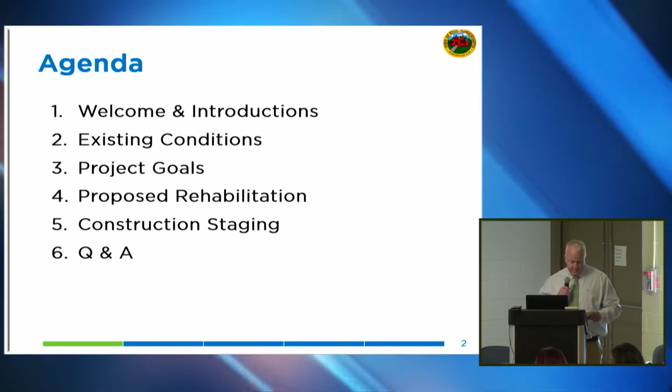So at this point, I'd just like to go through some introductions. From MassDOT's District 3 office, we have the Assistant Bridge Engineer, Mickey Splain. Our right-of-way representative from MassDOT is Melissa O'Day. Our consultant representation tonight from Fuss and O'Neill is Jamie French and Kristen Hayden. Our public outreach coordination consultant is Nate Curtis, who you met earlier, and Taylor Miller. Our stenographer tonight from Arlington Typing and Press is Greg Tarbucks. He'll be making a verbatim transcript of the hearing tonight.

The public hearing notice was placed in the Metro West Daily News on August 1st and August 8th. It was placed in the Beacon Villager as well on August 1st and August 8th. And the notice was also in the Stow Independent and Bolton Independent, and those dates that it appeared were July 26th and July 31st. A copy of the public hearing notice will be attached to the final hearing transcript.

So part of the project team: MassDOT's in-house bridge design group is doing the bridge design, and Fuss & O'Neill will be doing all other highway design, utility coordination design, and environmental permitting. Howard Stein Hudson, as I mentioned earlier, are assisting us with the public involvement. But I also want to point out that the town of Stow has been a great team member in this project through the preliminary design, helping us identify important aspects of the bridge location and concerns of the citizens.

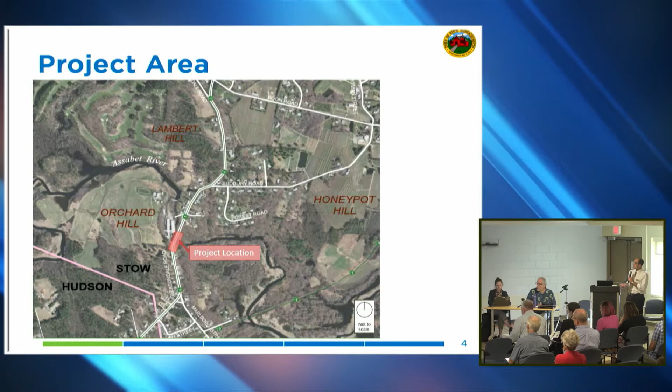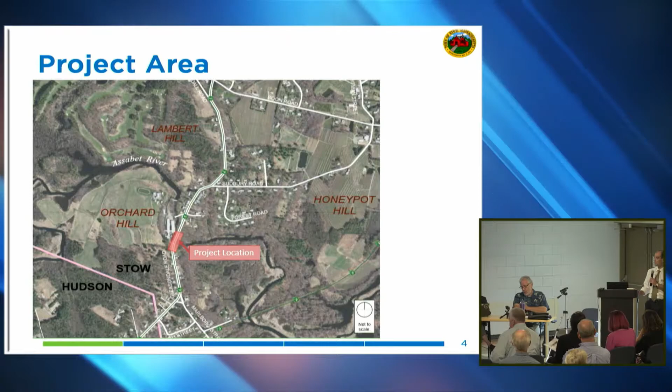Thank you very much, John. Appreciate it. So this is our project area, the area I'm circling with the laser pointer, that's the bridge in Gleasondale. We have the homes of some of our abutters who we've joined on a few site walks, and as the senator mentioned, we have some of the apple orchards around here, a very important road. This summer my toddler has developed a fixation with a book called Picking Apples and Pumpkins, so I have a feeling I may be joining you in the fall. I will try not to be an obstreperous driver when I get back.

So the existing conditions out there, this is a picture of the underside of the bridge, and you can see those deteriorated conditions. There are other photos that are worse, but I thought that's a pretty good one. It's pretty indicative.

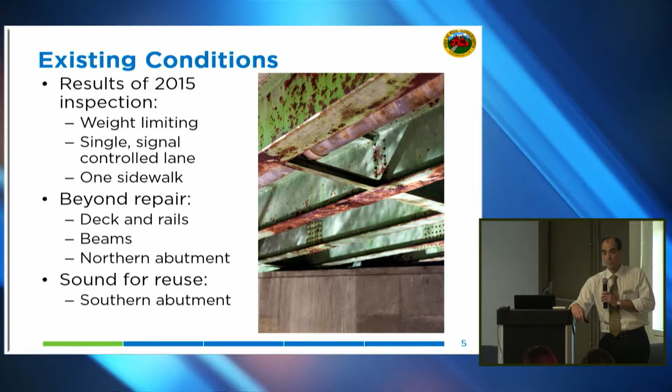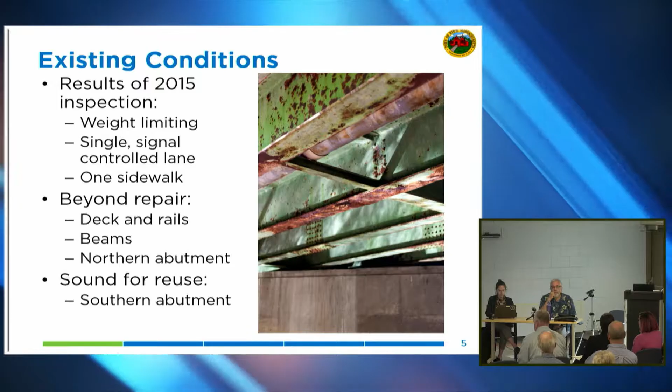As all of you who live in town are aware, the bridge has been in its condition of a single lane in each direction, alternating with the traffic signal since 2015, when there was a bridge inspection which weight limited the structure, put it into its single signal controlled lane, and the single sidewalk down one side. As John mentioned, there are parts of the bridge that are really past their useful lifespan. They can't be repaired. That includes the deck and the rails, being the part that stops you from toppling over when you're looking at the water, the beams which support the roadway deck, and then the northern abutment. As it turns out, the southern abutment is in reasonable condition and will be reused. So between the southern abutment and the northern abutment, some big differences.

So the project context, and the senator touched on some of this, the representative did as well. It's an important commuter route. It is a key trucking link. We know there are heavy trucks that travel this route. It's access to Stow's Pick Your Own Apple Orchards between Labor Day and Columbus Day. We know that's a very important time for the town's economy. It provides access to the Gleasondale Industrial Park, the former Woolens Mill. And we know from our efforts with the Stow first responders, we've coordinated with them several times, that 62 is an important corridor for first response, just moving through the area.

The bridge is closely abutted by homes to the north and south. We are aware of the canoe and kayak launching point on the bridge's northeast corner. We know the Assabet is an environmentally sensitive resource. And we know that right now the bridge in its current condition is subject to a stepped-up schedule of inspection, and when that happens, the bridge has to close with assorted traffic and travel impacts on all of you.

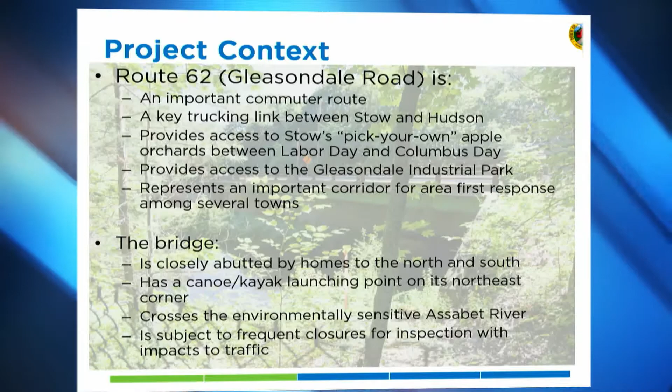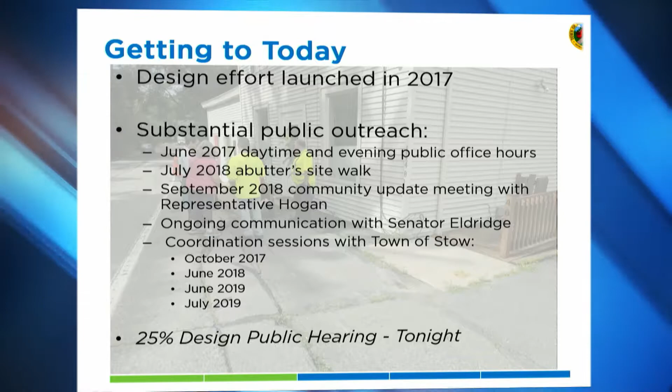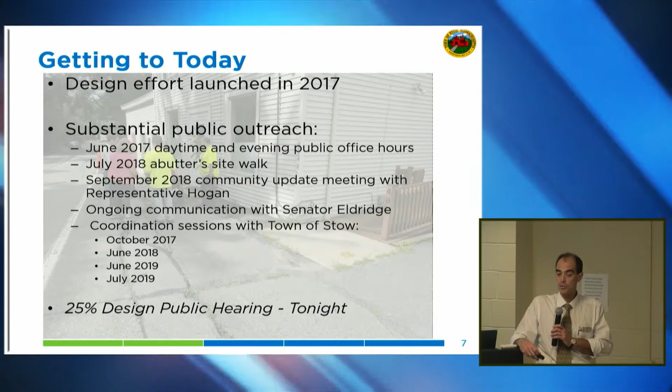Getting to today, the design effort was launched in 2017. As you can see, we've had substantial public outreach, including just beginning with office hours. I recognize some folks from my initial visit to Stow, where we sat in town hall and just asked people what they thought about the project. We've met with Stow frequently. In advance of this meeting, John ticked off all of the places where the meeting was advertised. There were flyers placed in the corridor to either side of the bridge on homes there, drops of flyers in the town hall, the post office, and the public library, and then we spent 2 hours last Thursday distributing flyers at your Shaw's on 155 Great Road, just to try to make sure we got enough people to this meeting tonight, which I think we did.

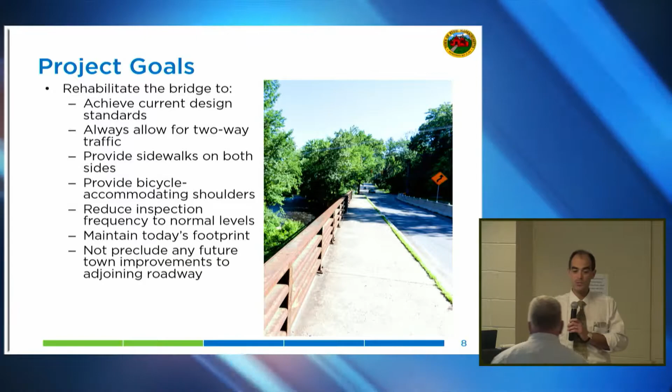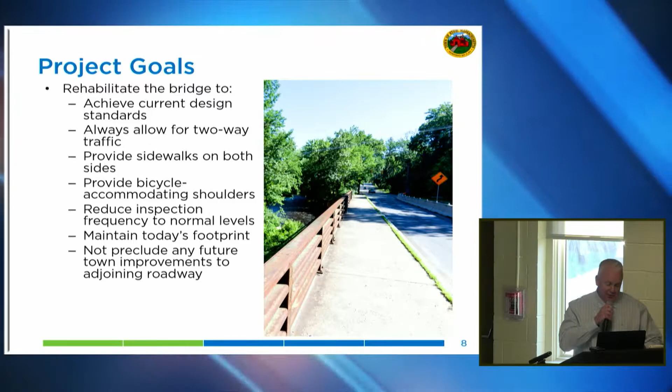At the beginning of the project, project goals were established and identified, and through some of Nate's efforts and Howard Stein Hudson's efforts on the public outreach, we identified some of the goals that we wanted to achieve with this project. In rehabilitating the bridge, it will achieve the bridge to be brought up to current design standards as far as the highway design and the function of the facility. We'll bring it up to the requirements up to current day standards.

Some of the goals were to return the traffic to two-way, one lane in each direction, to provide sidewalks on both sides, and we heard that bicycle accommodating shoulders were very important.

Another goal was reducing inspections by rehabilitating the bridge. Right now the bridge is on a 6-month inspection schedule that involves closing the bridge and working on it frequently. By rehabilitating the bridge, that will no longer be needed as often.

Another goal was to maintain the footprint of the bridge, the size and width and how much area it takes up. Another important goal was to not preclude any future town improvements to the adjoining street network that they may have planned in the area.

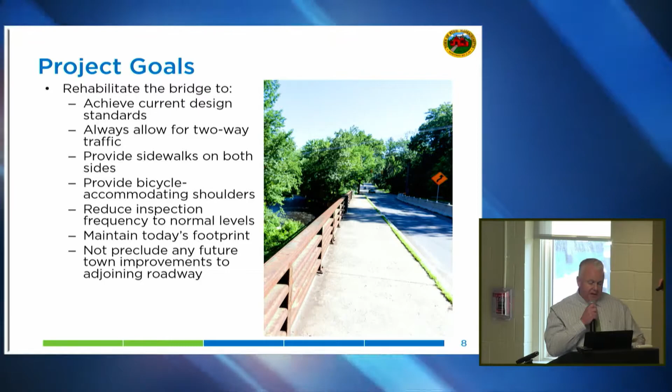The proposed bridge will include two 10-foot travel lanes and a 5-foot bicycle accommodating shoulder, up from 4 feet currently. We'll be putting back 6-foot sidewalks, wider than what's out there today, and extending their limits in some areas. The bridge will include a new crash-tested railing and end posts at the back of the sidewalk.

One thing we heard through coordinating with the town was that the views of the river were important to the users of the bridge and the residents, so we modeled our proposed bridge railing on an adjacent one in Hudson that you'll see examples of in the presentation.

Also, right now the roadway drainage on the bridge goes directly into the river through scuppers. With this project, we'll be able to take that drainage off the bridge and discharge it indirectly to the river with treatment, an improvement on drainage in the area.

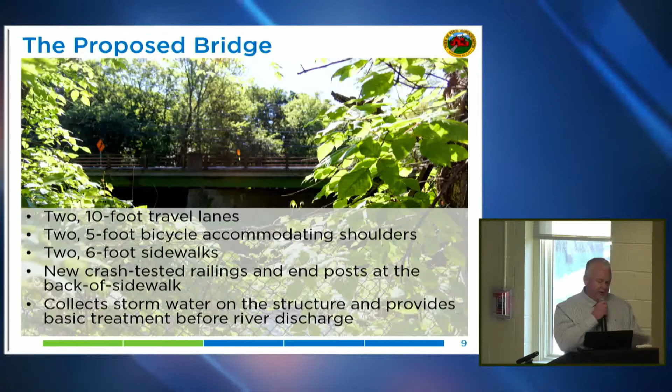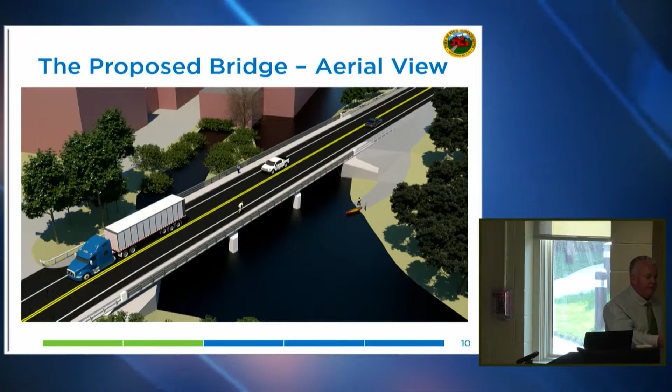This shows what the bridge is going to look like when it's done. As mentioned before, this up here is the northern abutment. This will be completely replaced due to its condition.

Both of these in the river are the two piers. Those will be maintained, as will the southern abutment down here. We'll do some work to patch them up and get them up to where they need to be, but they're in good shape, so we'll keep them.

Everything you see up here in the bridge deck, the girders, the deck, all of that will be replaced and new. It's going to look a lot like it does now. But better.

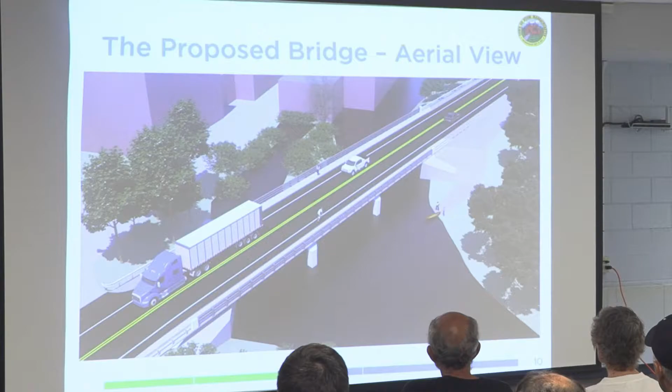Part of what we need to do to construct the project is relocate a lot of the utilities. Everybody knows there's a lot of overhead utilities here, and quite a few in the ground as well. So the first thing we'll do is move some of the utilities.

There is a utility pole somewhere in here, and to get to that pole we'll have to create an access in this shaded red area. Typically we would remove that access and restore it with grass, but because this is where the existing put-in for the river is, we're going to leave the majority of that access in place. It'll be about 5 feet wide with a gravel surface, and a little drainage on the inside corner so water drains into the river, but we'll leave it there for folks to use for access as they do now.

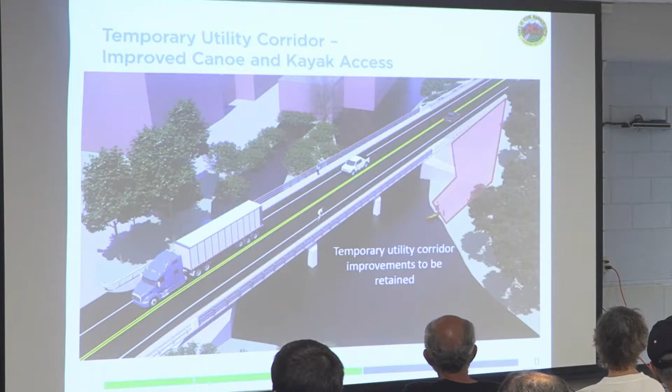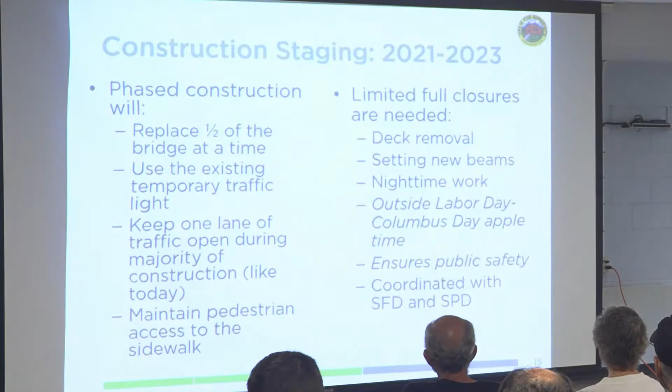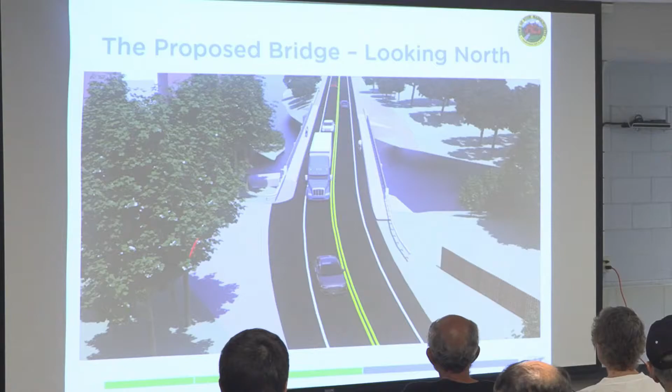This is where that access is and the put-in for the canoes. You can see over here the mill entrance as well. That's looking south, and here it is looking north, with the mill entrance again.

This is the bridge rail that John mentioned. It's a standard MassDOT rail that will allow people to see the river, and the standard color is black.

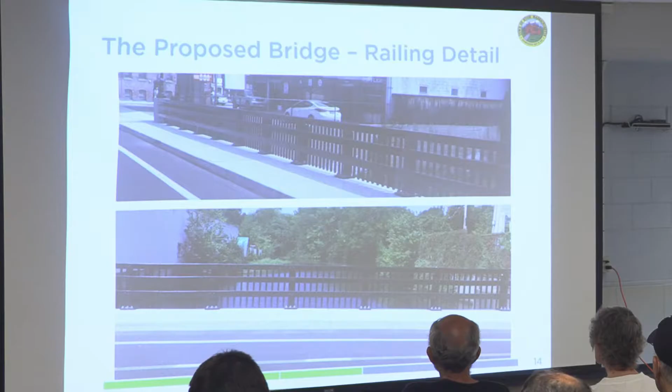So the construction staging: the bridge will be built in 2 stages. Right now, we're estimating it'll take 2 to 2.5 construction seasons to complete. We'll be replacing half of the bridge at a time. It's basically going to stay in the configuration it is now for the first stage, and then we'll flip and do the other side.

Pedestrian access will be maintained throughout on the sidewalk that is open. We will have the need to fully close the road for a couple of construction activities: removing the existing bridge and setting the new beams. This is because we have to use a crane, and the crane placement will take up the majority of the roadway width, also swinging those components around. We don't want to do that over active traffic - it just isn't a safe condition.

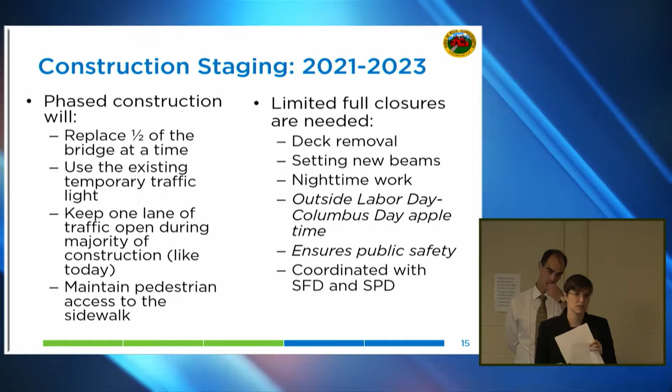That work, right now, we are intending to do at night. We are estimating that removing the existing bridge will take about 3 12-hour nights. Setting the new beams will take about 2 12-hour nights. That will happen in each phase, so it'll be 60 hours of closure in each phase, and they won't all be at the same time. The first one will happen pretty quickly, and the next one would happen about halfway through that stage. We have also coordinated with emergency services, fire and police, and concluded that nighttime is the best time to do it.

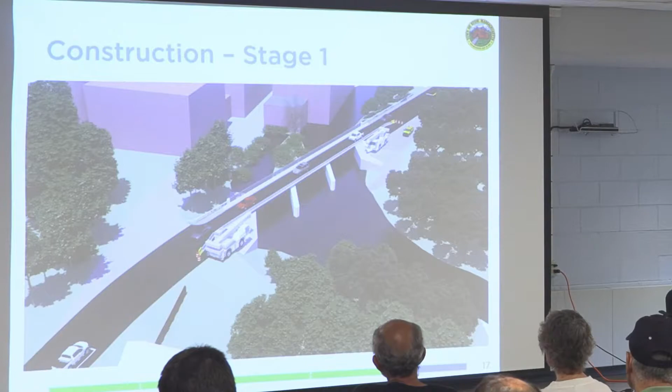So this is the existing configuration of the bridge with the lane closure. When we come in to start construction, you'll see that half of the bridge go away. The first thing we'll do is all the utility work, and then we'll come in, replace that abutment, patch up the piers, and then move on to the deck. Once that side is completed, we'll flip it - put traffic onto the newly completed phase, and move on to completing the second phase of construction.

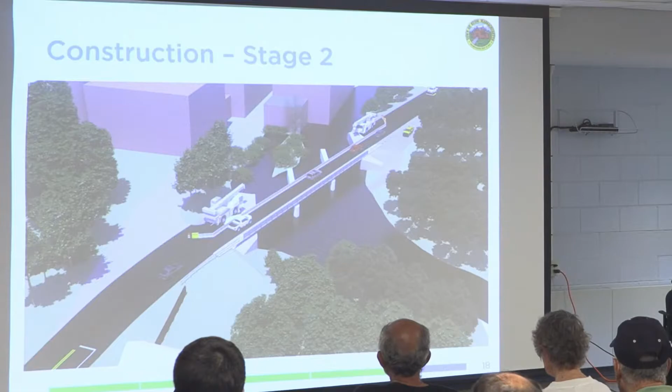And again, this is what the completed bridge will look like. Again, you see the access there for the canoes.

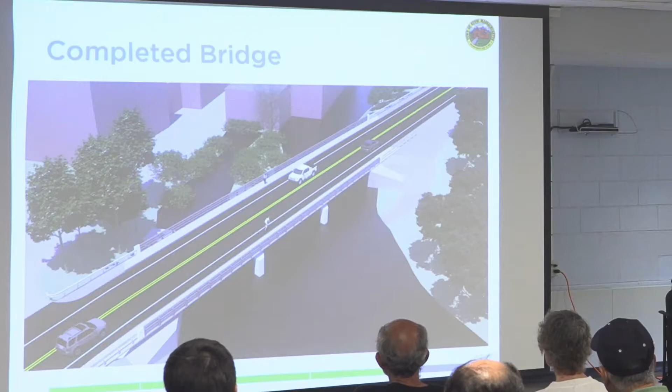So this is just the plan view, the same plan that you saw on the board over here. One of the questions that has come up is the southwest corner, which is right over here. As you come around this corner, there's a stone wall, and that's really limiting the amount of width we have. In that area, we can either do a bike lane or a sidewalk - we don't have enough space for both.

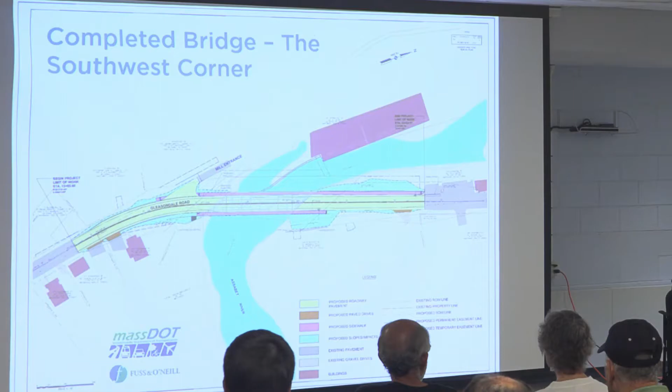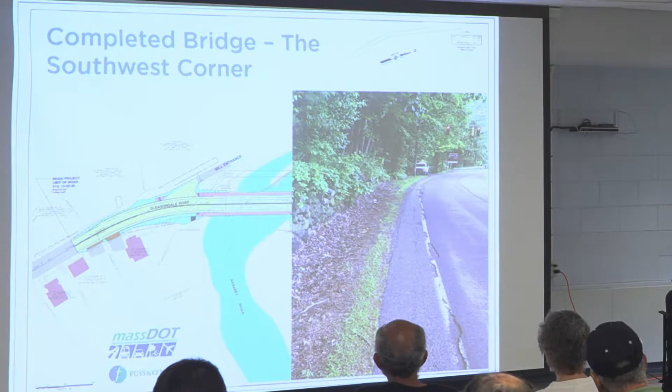For the canoe and kayak access during construction that's there now, that will basically be closed for the duration. The entire area is going to be a construction zone - it's going to be ripped up right away to put the utility work in, so it's really just not safe to have people going into that area. It will be closed until the end, and then it'll be left as we have it. If there are other areas where folks can put in a canoe, preferably downstream from the construction site, MassDOT is willing to work with folks to make sure that information is out there so people know where to go.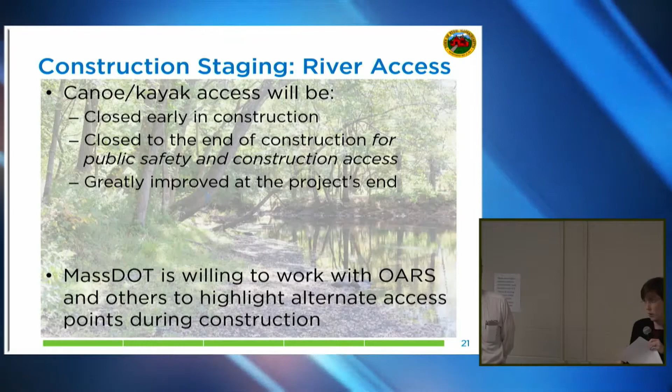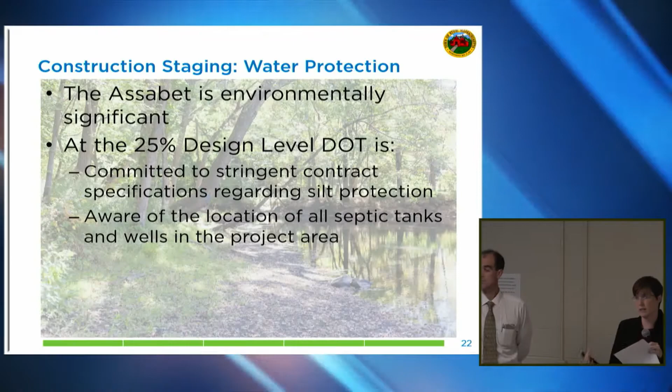We are doing work over a stream, which is obviously environmentally significant. At this stage, we will be making sure there are protections in the contract so the contractor doesn't get silt and sediment into the stream. We're also aware that there are septic tanks and wells very close to the project site - those will be noted on the plan so the contractor knows he has to provide the appropriate protections.

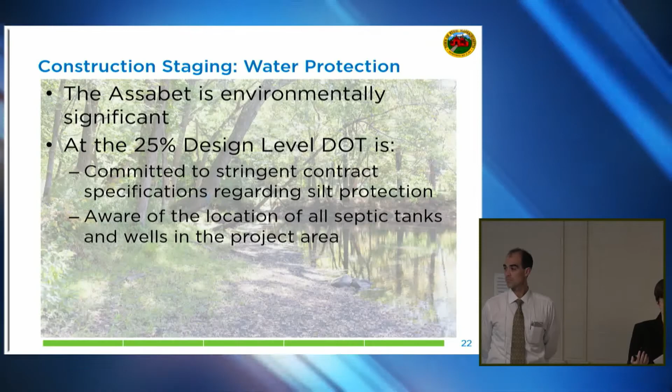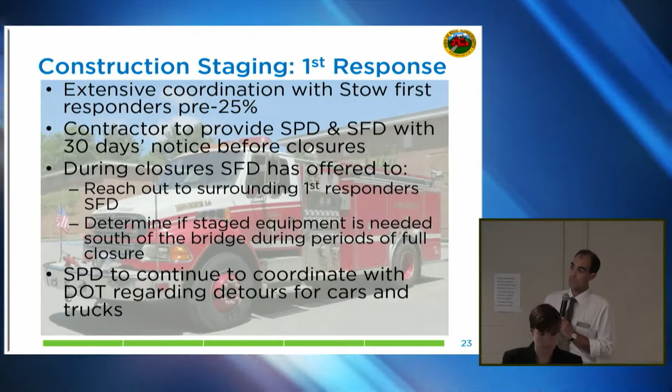Nicely done, Jamie. Jamie spoke about how we've determined the best timing for the work that will close the whole bridge. That was coordinated via meetings with your fire and police chief here in Stow. They've been extremely helpful, and we've worked with them quite a bit. When the contractor undertakes those closures, the first people to know outside of the MassDOT resident engineer will be your fire and police chief, who will receive 30 days notice in advance of any closure of the bridge.

The fire department has offered to reach out to other surrounding first responders. They do a daily radio check to something like 30-odd communities, so they'll be able to broadcast that news. They will determine if staged equipment is needed to the south of the bridge during periods of full closure.

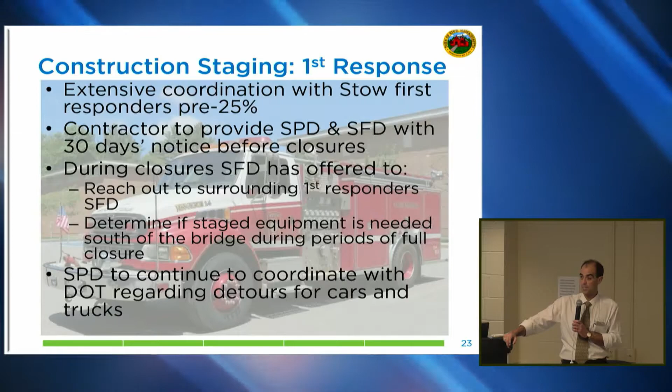When the bridge is closed, there's a need to detour traffic. At present, the most logical detour route also has a weight-limited bridge on it. So during full closures we need to work with Stow Police as well as the Mass Motor Trucking Association to get the information out to truckers, so you don't wind up with a truck going beyond the point of no return and getting trapped adjacent to the work zone or one of the roads near it.

The outreach will not end with construction. We anticipate a public information meeting, probably in this room, in advance of construction beginning. The contractor will show up and appear in this room so you can meet them and understand how they're going to undertake their work.

MassDOT has gotten very good in recent years about issuing regular emails on project progress and what's ahead. So for projects where you've joined the stakeholder database—which all of you who signed in have already done—you'll get an email every couple of weeks saying, here's what we achieved in the last two weeks, here's what you can expect in the next two weeks.

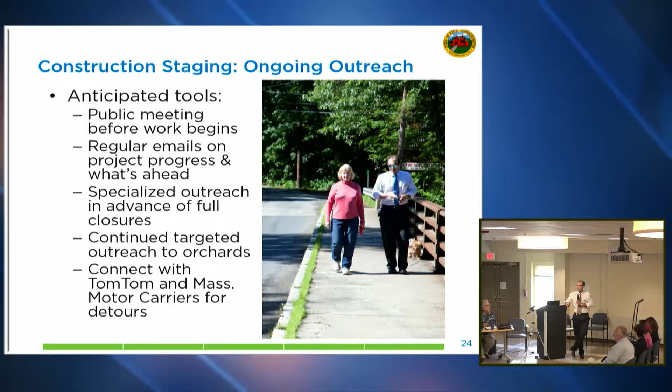I don't know if folks remember TomTom—remember the ad, 'we're lost, Susu'? But TomTom, if you can believe it, has kind of gone underground. They actually provide the back end for the directions here on the phone.

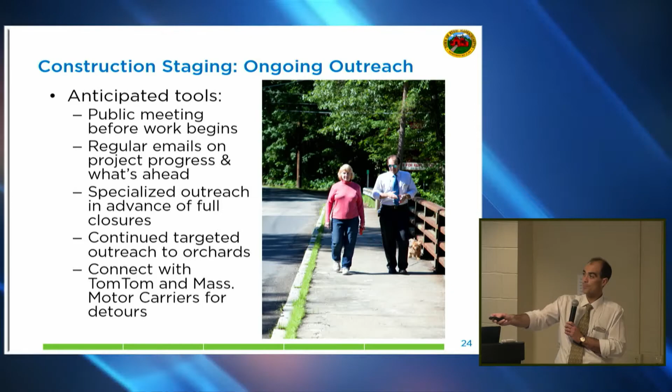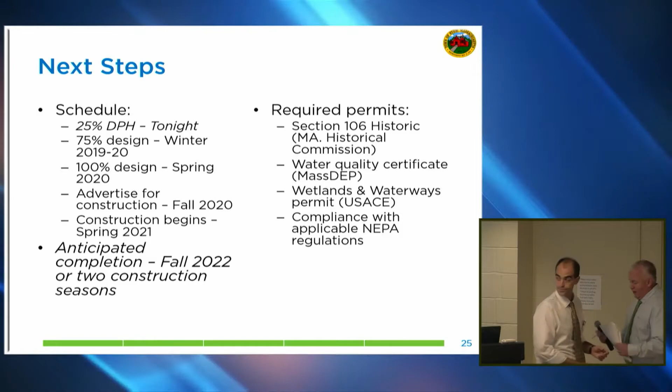So just want to quickly talk about some of the next steps and permits required. Right now we're at the 25% design hearing. The next design submission would be the 75% design, which we anticipate will be in the winter of 2019 or early 2020. 100% design would then follow in the spring of 2020. Similar to the preliminary design, we would share those design submissions with the town and its departments for their feedback and comments.

Right now we're carrying an advertisement date for construction in the fall of 2020, meaning the plans would be made available to contractors to place their bids, if they're interested in doing the construction. We anticipate construction beginning in spring 2021, taking about 2 construction seasons. As we develop the design plans and specifications through final design, we'll get a better handle on the construction duration.

As the design develops, we can refine that frequency or that period.

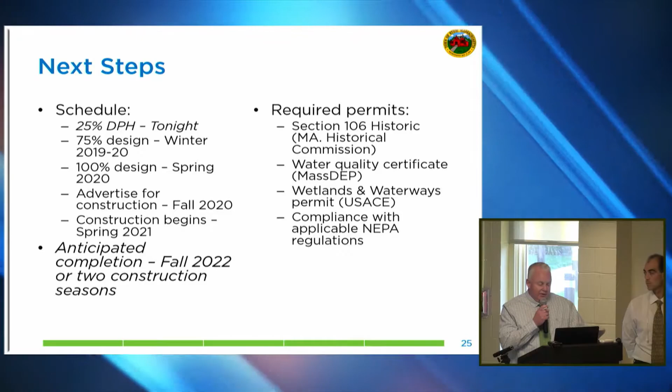We'll also need to provide proof that we're compliant with the National Environmental Policy Act, and we'll need to do what's called a categorical exclusion permit. It's a list of questions that documents or tries to elicit if we're causing any significant impact at all, and we're fairly confident that we're not.

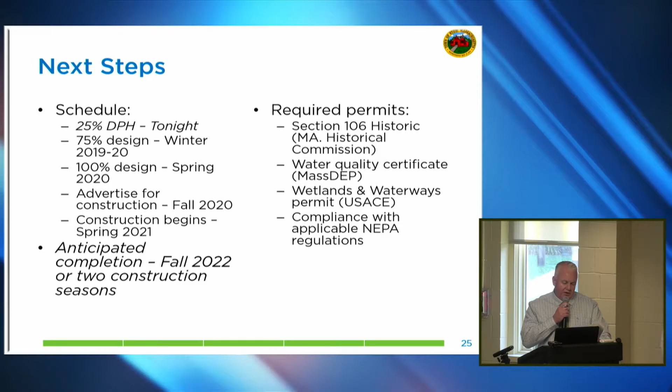So before I open up the public hearing to public comment, I just want to go over a couple of ground rules that we have, just to help this part of the presentation go smoothly.

As I mentioned earlier, the public hearing is to solicit input regarding this project. As the plans aren't complete, we're in preliminary design, so there may be some questions that we might not be able to provide you an answer to now.

Anyone who wishes to speak, we'd like to have them come forward to this general area up here. We have Arlington Typing and Press, Greg is doing a verbatim transcript, and the microphone's here, so we'll help him pick up the information you want to share with us. We'll need you to state your name, spell it please, and list your affiliation, if you're an abutter, local official, or whatever. Again, this is for us to get a verbatim transcript.

Also, for people who don't want to speak tonight, there's a mail-in sheet for your comments. It's available in the public hearing handout. You can write your questions or comments on that and leave it with me tonight, or mail it into MassDOT within 10 days, and we'll respond to those.

Finally, it's normal procedure to ask if any elected officials want to offer their comments first, and I know we had a couple that did earlier, so I don't know if there's any federal, state, or local officials who would like to speak at this time that haven't spoken.

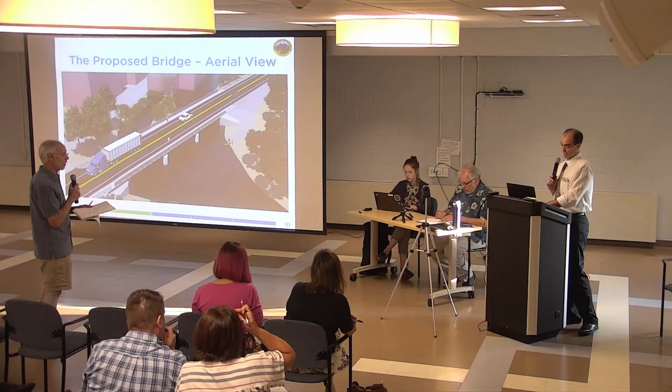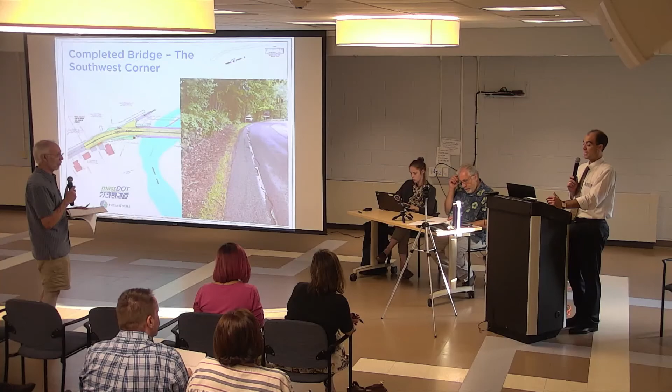Yeah, and the only thing I would add to that is, we noted that... I want to thank OARS for coming to the office hours in 2017. The comments they made were very well put together. I admit I forget the names of the 2 ladies who joined me that evening, but they were extremely pleasant. If there are other locations you know of in the area that allow people to access the river, we are happy to generate materials for you that you can disperse to your membership to say 'this is closed, please go here,' so that for the second year people will know what to do. But that first construction season you might get people bumping into it, going 'hey, there's a bulldozer in my canoe launch.' So we'd be more than happy to help out with that, because we recognize it's important to you.

All right, I think we're going to need some signage or something to warn people not to go down there at the spot they're used to going while you're doing your construction, because it could be dangerous for both the paddlers and you.

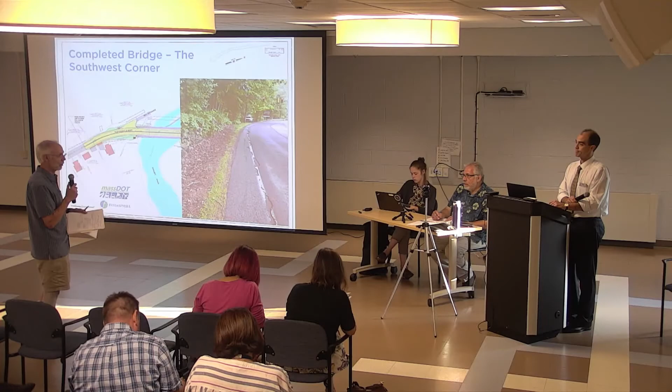I just want to put on my biking hat for a moment, because I also was advocating for the 5-foot bike lanes. You've got that in your plan, thank you again, I think that's terrific. Regarding the comment about what to do with the bike lane, I second that - we've got to make sure the bike riders understand what they're doing. I think a worse option would be to have the bike lane end and send the bike rider off into a gravel siding there. I'm happy to ride in the road after I get over the bridge. It's really nice to have that space on the bridge, because there's nowhere else to go.

So again, just thank you for being responsive to our comments. I've been to many public hearings over the years, and in many cases comments just get disregarded, and I thank you for being responsive. You are very welcome, sir, thank you for your comments.

Other hands? Jesse Stedman, Town of Stow. Yeah, thank you guys, so yes, Jesse Stedman, Town of Stow, Town Planner.

If you guys could just explain, I know MassDOT has a pretty stringent right-of-way process - when would folks who might have a temporary easement or a permanent easement first be contacted? How would that work? I just want to try to avoid any surprises when that time comes. Thank you. Should we bring our friendly neighborhood ROW specialist down, because right-of-way is the one thing in this whole process that actually scares me. So here we go, give it to someone who knows what they're doing.